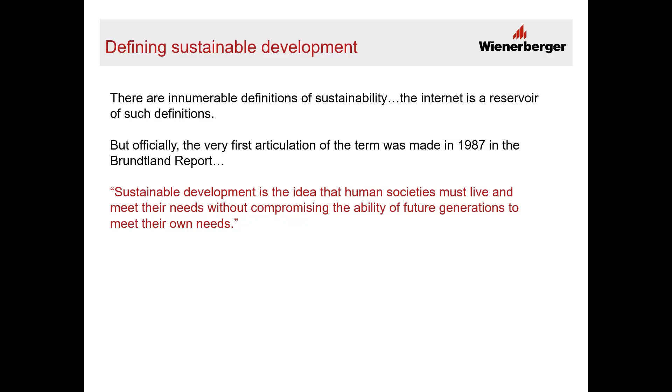But officially, the first articulation of this term was made in 1987 in the Brundtland report. The definition goes: sustainable development is the idea that human societies must live and meet their needs without compromising the ability of future generations to meet their own needs. A very meaningful statement, extremely meaningful, but it makes a lot of long-term sense. Let's live today, let's enjoy our lives today, without compromising on future generations and their ability to enjoy as well.

Why now? Yesterday we thought we knew how tomorrow would be. Today we have no idea how our tomorrow would be anymore. In times of extreme uncertainty, we must protect, in every capacity, our world for our future generations.

Sustainable development is a holistic concept with three key aspects: society, environment, and economy. Three major aspects - it can also be termed as ecology, emotions, economy. The concurrence of these three important parts of our life: one is environment, which is ecology; emotions is society, well-being; economy is economy - and that turns into being sustainable. That's exactly what we would look at in this. Let's have a poll question: three major aspects for sustainability.

Today, our industry - when I say construction industry - is affected with labor, impacted with finance, impacted with demand. How do we try to meet these ends together? Why is the construction industry always in a double whammy?

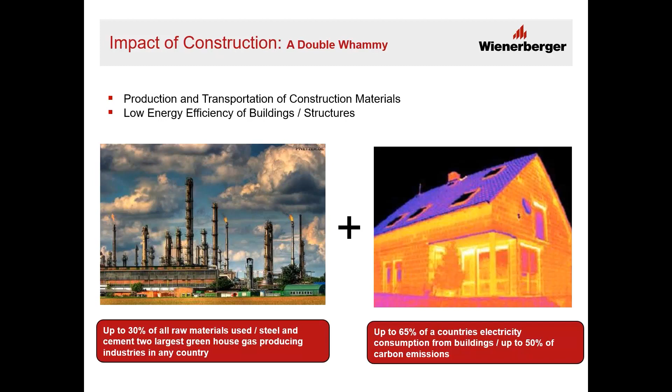The reason is the usage of raw materials used in construction, which is steel and cement, are the two largest greenhouse gas producing industries. The low energy efficiency of buildings which are designed needs to change into high energy efficiency of building structure designs.

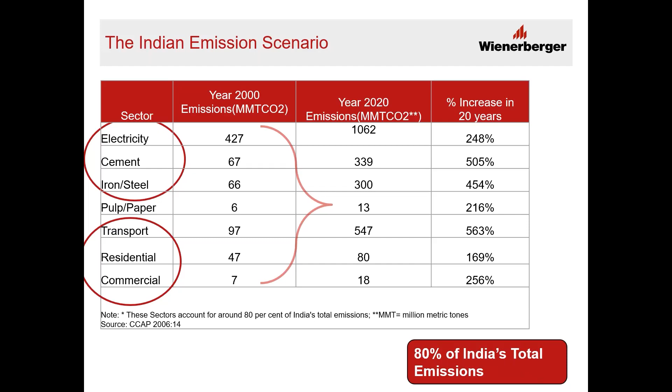It would be a double whammy as well. We need to take right steps and right actions and be conscious about our use now itself. As mentioned, construction industry happens to be for development.

Steel and cement are the 2 largest greenhouse gas producers. Up to 65% of our country's electricity consumption comes from buildings, residential buildings. Up to 50% contributes to our carbon emissions.

India, as a geography, can be divided into 5 climatic zones. 4 of these climatic zones are dominated by cooling requirements, meaning they need air conditioners to cool their houses and make life comfortable indoors of the house or office. That's exactly why residential demand is growing.

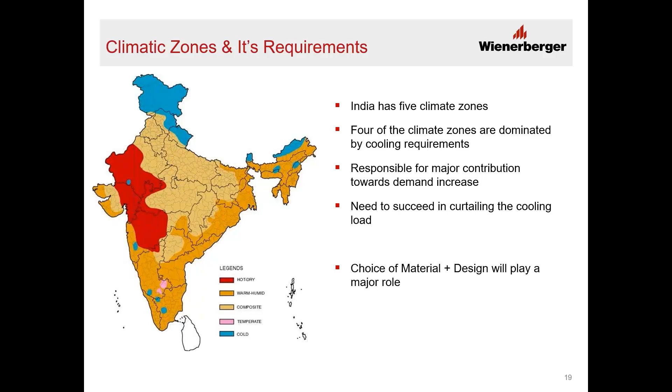How much is it growing for? Let's have a closer look at it. In the year 2017, residential energy consumption demand was 24% out of the total energy consumption. In 2030, it grows double digit, coming to 38% of the requirement. From 255 terawatt hours of energy consumed as electricity in 2017, it requires close to 850 terawatt hours of energy by the year 2030.

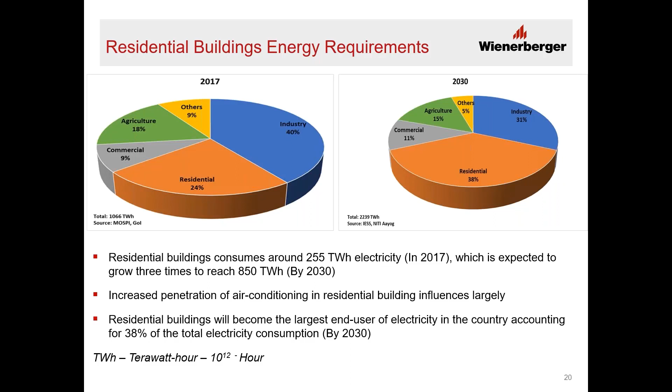That's huge growth as far as residential demand is concerned, and largely this increased penetration is because of air conditioning in residential and commercial buildings, which would influence the demand of energy as far as buildings are concerned.

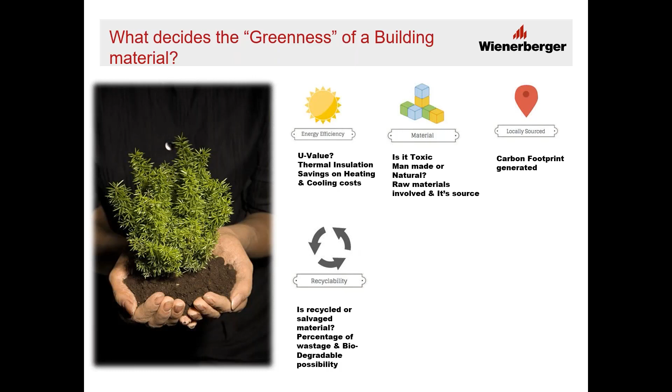Recyclability of the material is a very important aspect in the choice of material - is recycling possible during use and after use of the material we select? Manufacturing - the process of manufacturing, the polluting potential that an industry or manufacturing process creates, and most importantly, how labor intensive our process is.

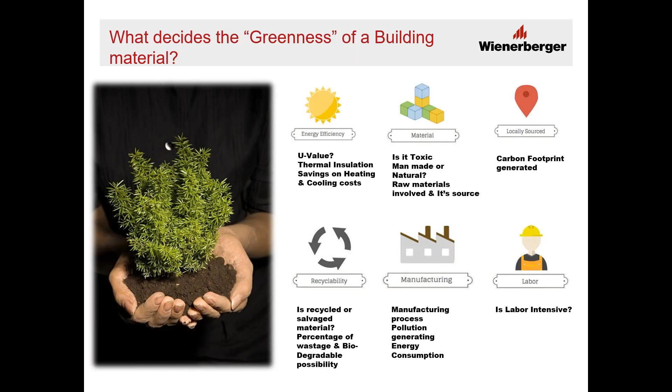Let's categorize the essentials, the needs, into economy, emotions, and ecology, and let's see how we can influence this by the right choice of material, the right selection of material. What is economy for construction?

Affordability is always the cost of the finished product - in this case, a building or a house. For a building, affordability comes from saving on cost of construction, but without compromising on quality, with efficiency in productivity and reducing wastage as much as possible.

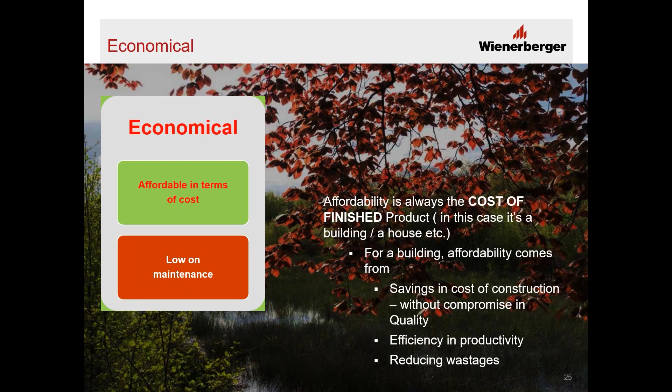Does weight matter? Yes, weight matters a lot. How? Let's compare commonly used clay walling materials - how does the weight factor run as far as individual walling materials are concerned for comparison? The densities - density is a translation of weight.

Let's look at density. Conventional clay bricks are around 1800 kg per cubic meter. Concrete blocks are 2200 kgs per cubic meter. Engineered clay hollow blocks are just 700 kg per cubic meter.

How does it influence things? What are the influencing aspects if we use a lightweight walling material? Huge amount of structural saving potential, enhanced stability of the structure, speed of construction, high output with less manpower, and low wastage.

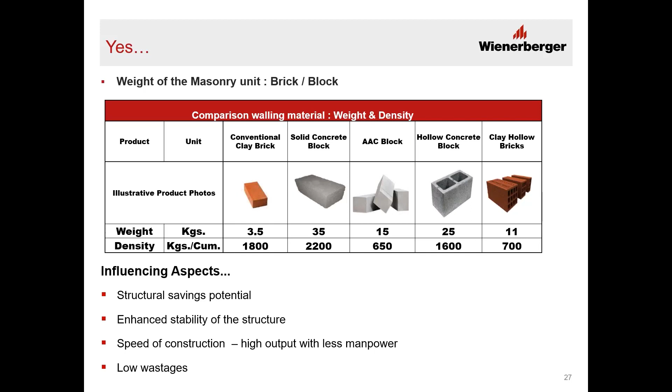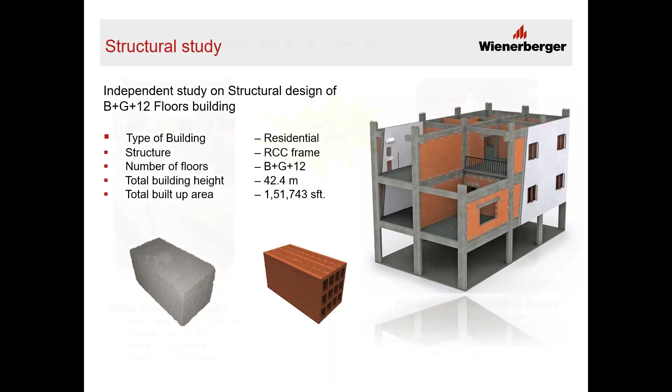For an independent study conducted on a basement ground plus 12 story building with a built-up area of 1,51,000 square feet, the walling materials considered were a high density walling material - solid concrete blocks at 2200 kg per cubic meter - and engineered clay hollow blocks at around 700 kg per cubic meter. Let's see how using 65% lighter weight material can influence the savings it can bring to the table.

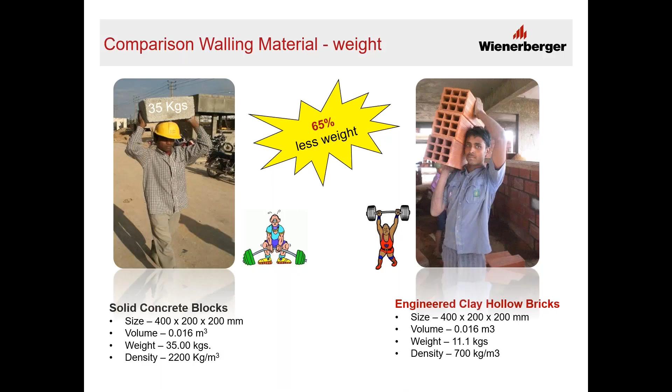The savings only in footings of the building. The building is basement, ground plus 12, which was used for the study. Only in concrete we could save close to 400 cubic meters of concrete because the footing sizes could be optimized using lightweight walling material.

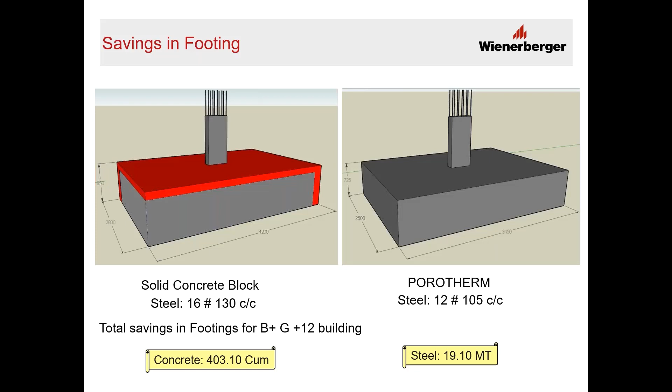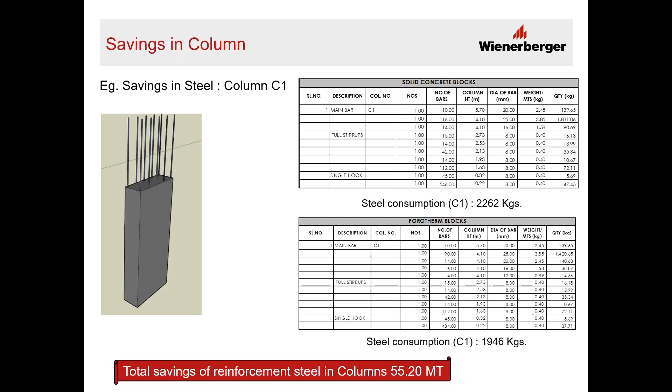In columns, the reinforcement steel which we could save is close to 55 metric tons on all the columns in the building, as well as savings from the beams, around 24-25 metric tons of reinforcement steel which goes into the beams.

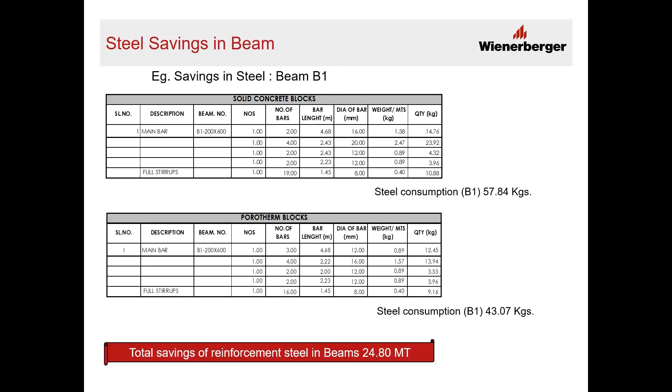As a summary, the deltas are huge, the differences are huge. What does it translate to in terms of savings? In concrete we could save close to 400 cubic meters of concrete. We could save close to 100 tons of steel. Today the prices of steel and cement or concrete are fluctuating, and the total structural savings which we could achieve is very encouraging. It's close to 53 rupees per square feet of the built-up area.

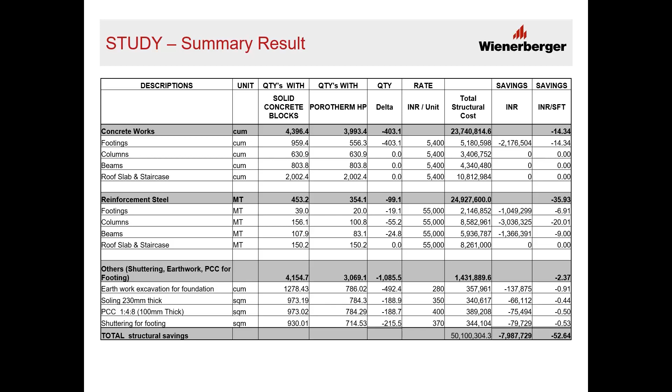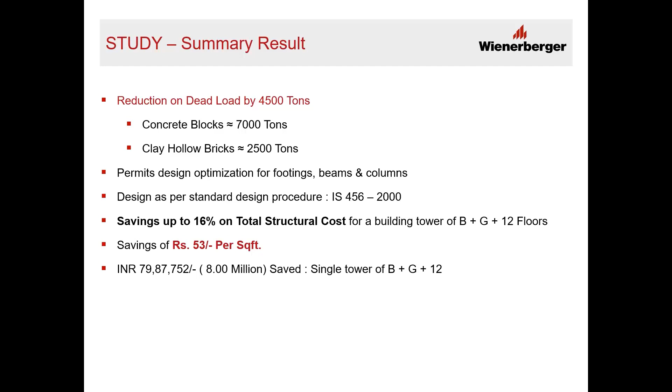So let's see the summary of the study. The dead load we reduced on the building by use of engineered clay hollow bricks is close to 4,500 tons. The design was as per IS standards without compromising on the design safety features of the building. There is a saving potential of close to 16% on total structural cost. Total cost saving would be close to 8 million rupees, which is huge and considerable.

Higher productivity ensures optimal use of manpower on site. It's not a matter of the lean period we are experiencing currently as far as manpower availability is concerned. In India, we celebrate a lot of festivals, which is good, but manpower also wish to go to their natives and celebrate. So it has become a perennial issue in terms of supply of manpower. Instead of cribbing about less manpower, can we change our view towards bringing in more productivity at the same task without compromising on the task? Can we increase the productivity of construction itself? Yes, there is a possibility for certain.

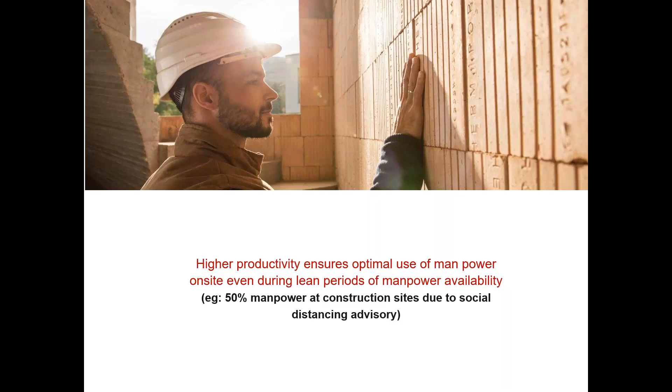Innovating continuously, combining precision and sustainability in the construction process. Porotherm dry fix system. It's a gluing system that guarantees super fast construction. Construction could be 5 times faster. That means saving in manpower would also translate to close to 5 times. Saves time and labor. Zero shrinkage cracks.

Zero requirement of water. Water is a natural resource, and we are already facing a huge dearth of natural water. No curing required at all for the masonry walls we construct. Zero requirement of mortar, no sand, no cement. It's such a benefit which we can get. Zero wastage at the site, clean and dry site.

This is the actual study conducted on a construction site. G+18 floor tower, built-up area 5 lakh square feet, walling area 4.5 lakh square feet, close to 5.2 lakh units of bricks used. We could complete the walling of this G+18 tower within 6 months. What was the manpower used? Just 40-45: masons were 20, helpers were around 25.

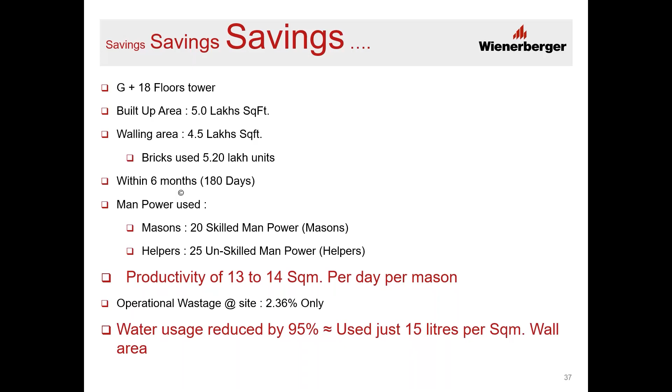The productivity could be escalated to 13 to 14 square meters per day per mason. Operational wastage at the site during construction was as low as 2.36% only. The best part of the whole study, which I personally like, is water use reduced by 95%. We use just 15 liters of water per square meter of wall area versus 300 liters in the conventional masonry system. Here we required only 15 liters of water because no curing is required.

Weight influences? Yes, weight influences. How? High savings on structural cost, enhanced productivity, and use of innovative systems can further enhance time and resource efficiency.

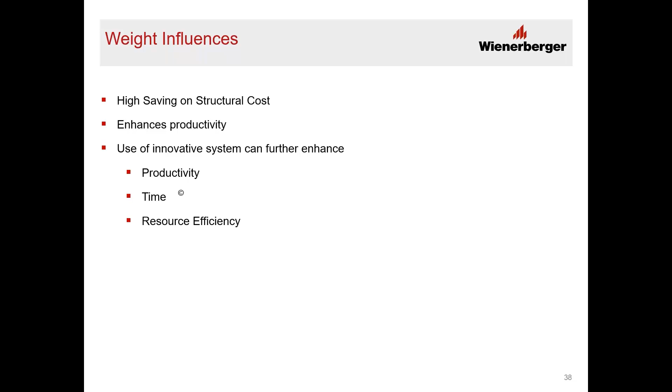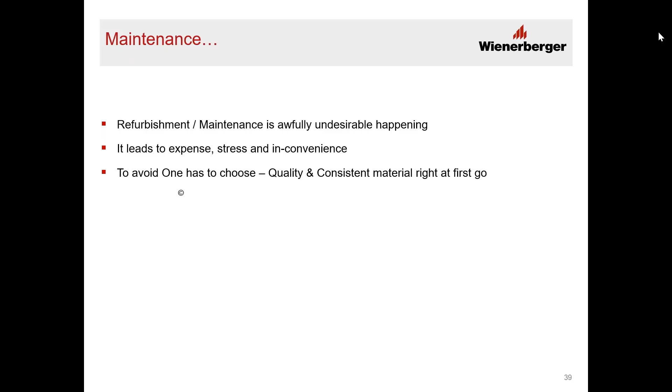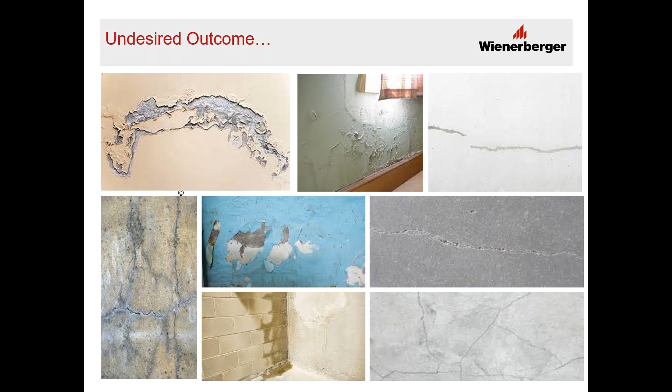Maintenance and refurbishment of the building is an awfully undesirable happening. It leads to expense, stress, and inconvenience. To avoid it, one has to choose quality and consistent material right at the first go. Undesired outcomes: seepages, shrinkage cracks, and that too in the early life of the building. Absolutely undesired. Let's look at water as the main culprit.

Water, yes, water is required for everything, but undesired quantity of water at undesired locations becomes the main culprit as far as building is concerned. Major problems that we face today, may it be seepage, may it be leakage, may it be shrinkage cracks, come as a major concern because of water.

Let's look at water absorbed by different walling materials used commonly in the construction industry: the clay bricks, the concrete blocks, the AAC, autoclaved aerated blocks, hollow concrete blocks, and clay hollow engineered bricks. Water absorbed is very varying. A conventional clay brick would absorb close to 2.5 liters of water when tested as per standard testing processes. Solid concrete block, 2.8 liters.

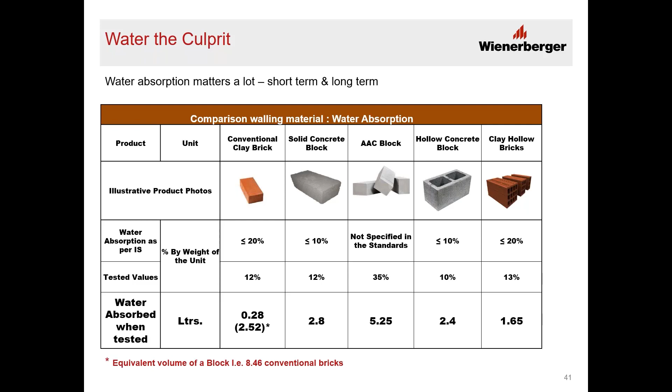Aerocon aerated concrete block would be 5.25 liters of water. It becomes a water holder as far as the wall is concerned within one unit of block. Engineered clay hollow bricks, just 1.6 liters of water. It affects largely because with that much water within the body of the block, the drying would also take a very long time.

Shrinkage cracks and high water content. Shrinkage cracks are one additional culprit in deteriorating the well-being of the house. Today's new age materials pose new challenges, especially on crack formations. Aerated concrete has an inherent characteristic of very high water absorption, due to which shrinkage cracks occur invariably. This leads to early maintenance on a freshly constructed wall, a very undesirable episode to happen with anybody for that matter.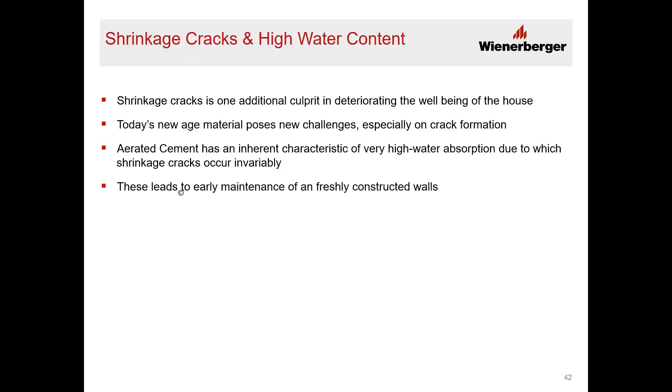Low on maintenance, engineered clay hollow blocks are resource efficient, known for their quality and consistency. Zero shrinkage cracks. Every brick is marked with a batch number or an identification number.

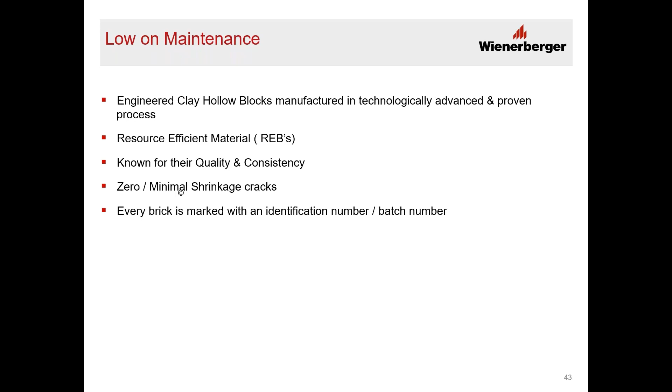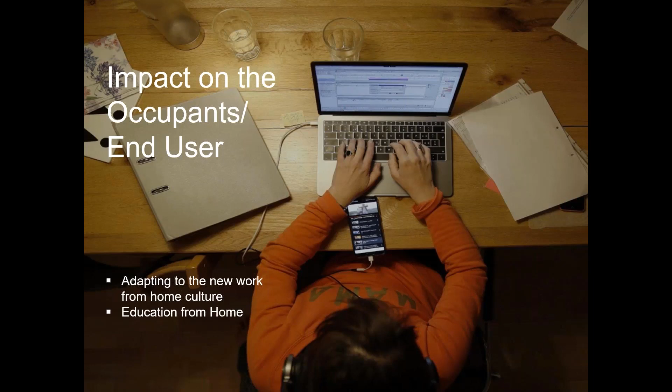How does today's world impact the end users? We are adapting to the new work culture, that is work from home, learn from home, study from home. Meeting the needs of occupants today: comfort at home, most important. Saving cost on electricity bills, very, very necessary. Comfortable temperatures for long work hours from home. Yes, the prime requirement today.

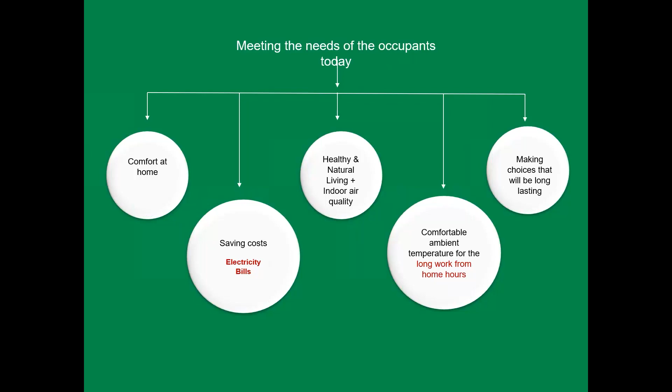Let's look at the emotions which are concerned and how we can bring natural as well as healthy living experiences by utilizing the right material. Clay. Clay is natural. Clay is healthy. Safe as well. Clay is the most adaptable, naturally occurring material. It's breathable. It regulates temperature and humidity. Shows excellent drying behavior. No toxic emissions at all. Healthy indoor air quality.

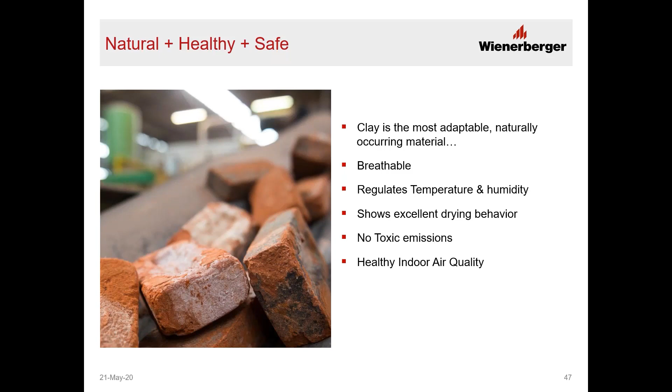What makes clay bricks sustainable? Why would clay bricks be called sustainable or resource efficient bricks? Let's have a quick look. Drastically reduces resources. The voids, the hollows present in the brick reduce the resources we use at every stage, right from production to utilization of the brick at the sites. Natural thermal insulation. Of course, the lower U values dominate because of the geometry of the clay product, but they also provide active and latent cooling.

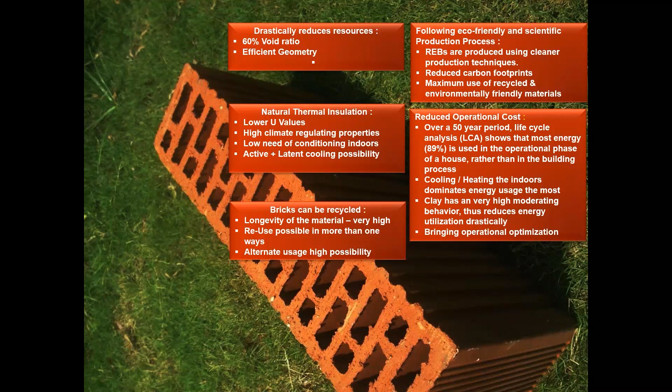The air voids. Air is the best thermal insulating material. It provides a lot of thermal comfort, a lot of insulation from heat ingress into the houses, and naturally thermal insulation can be brought into the house. Bricks can be recycled. Longevity of the material is well proven, very high. Reuse possibility as well, very high. Following eco-friendly and scientific production processes, the brick is manufactured in a very resource efficient manner. Reduced operational cost of the whole building if clay bricks are used.

How are hollow blocks resource efficient? Clay hollow blocks maximize output while minimizing the demand on resources. They hold huge saving potentials, some of which we have already seen in our earlier slides. Brick walls can contribute to improved indoor air quality by eliminating VOCs, and thereby the indoor environment can be free of any kind of emissions and allergens.

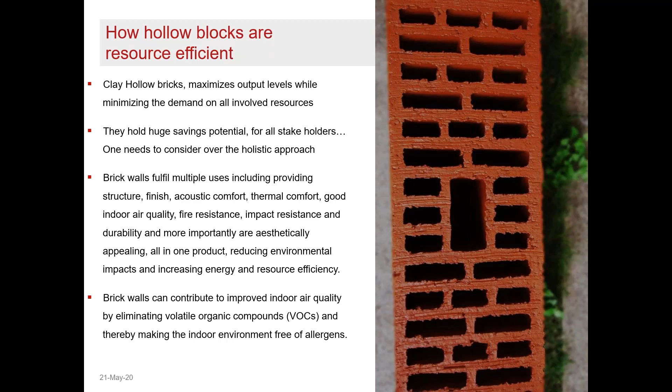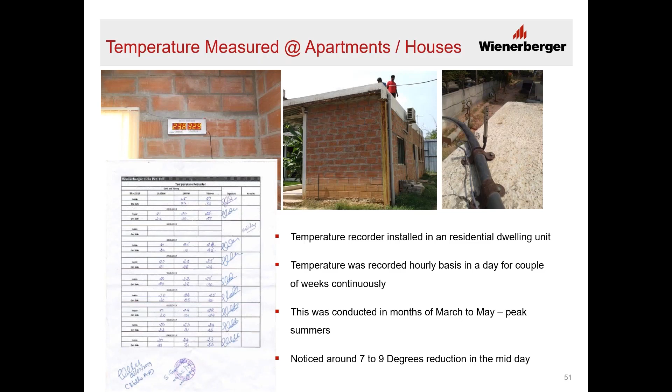While we talk of a lot of things, let's measure it in actual reality. We measured an apartment for the difference between the outdoor temperature and the indoor temperature. The temperatures were measured in the peak summer season, which normally runs from March to May, and the measurements were taken continuously for a long period of time. In a clay brick apartment, we could see a difference between outside and inside of close to 7 to 9 degrees Celsius. The inside was cooler without artificial cooling as compared to the outside temperature.

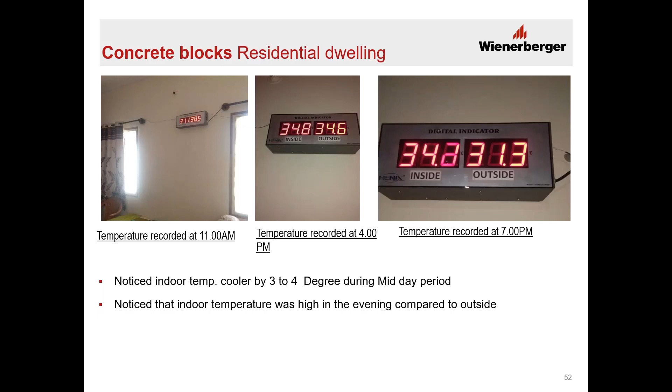We also did that in a concrete block residence or dwelling. We measured the temperature. Yes, there was some difference between outside and inside. It was just 3 to 4 degrees Celsius. But a very peculiar observation we could come across is that as the outside gets heated because of the sun, let's say 11 o'clock, 2 o'clock, 2 o'clock is the peak heat which we feel in the afternoon, the temperatures indoors also rise. In case of clay walling, it rises, but to a certain extent, not beyond 27-28 degrees Celsius.

And as soon as the outside becomes ambient, more comfortable, around 4 p.m., 4 in the evening onwards, the inside of the house built with clay hollow bricks also starts cooling very, very fast. It starts dropping the heat which was accumulated during the day very fast.

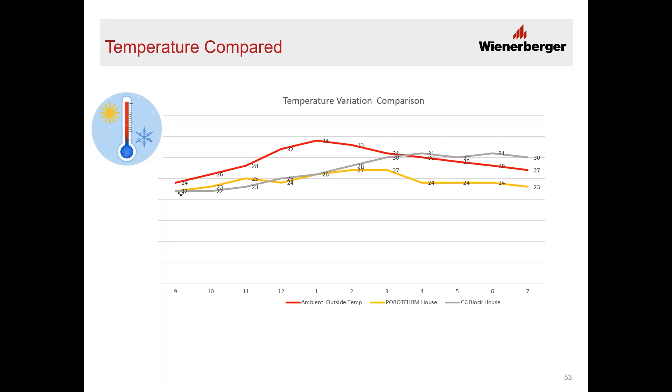Whereas in concrete, it keeps getting hotter and hotter. It reaches a maximum of 33-34 degrees Celsius. But as the outside starts becoming cooler, the temperature still remains hotter inside. The outside can be around 28 degrees Celsius, but inside it still hovers between 30 to 31 degrees Celsius.

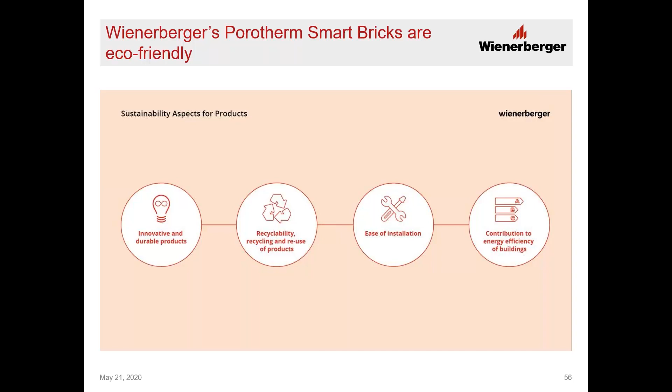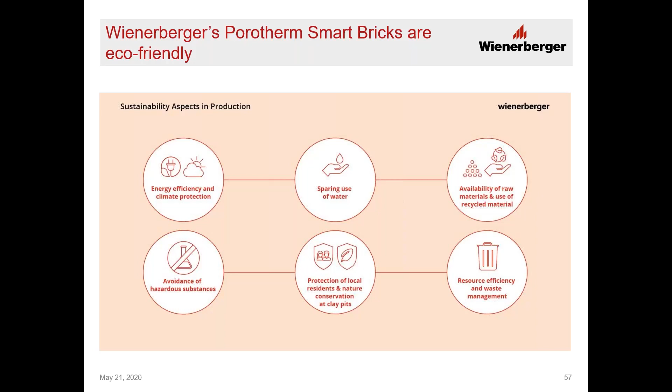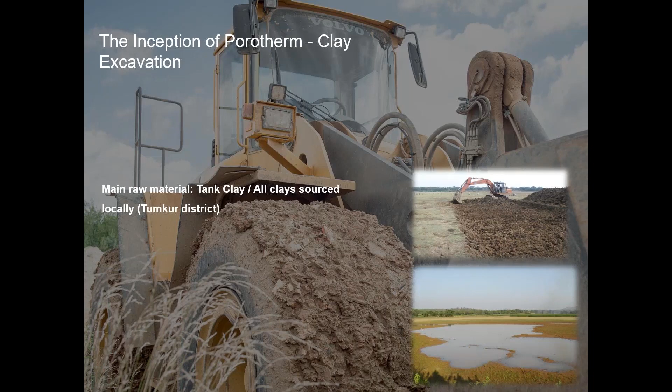The inception of Porotherm: clay excavation. Where does the clay come from? Where do we take clay from? Locally, yes. All clay is sourced within a distance of 4 to 12 kilometers. It's sourced by desilting clay tanks, non-agricultural land. It regenerates the water tanks. It gives new life to the lakes, whereas we take the clay to manufacture bricks.

Naturally available organic waste used as embedded body fuel. No toxic chemicals, not a single gram of cement, no color pigments or binding agents being used in these bricks. It's green building rated, it's GRIHA rated as well.

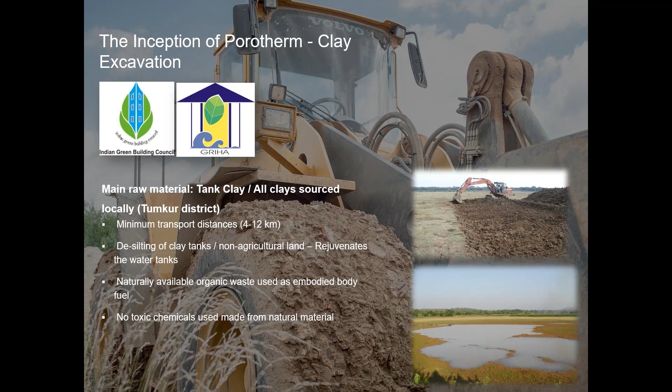Dead lake bed. This is the lake bed which is dead. There is no water in the lake. By efforts over more than 10 years, we were able to have a lake so beautiful. I can call it a live lake. I in fact wanted to give a title on the top, but the photo is so very beautiful, I constrained myself from putting a title on the top. It's a live lake. From a dead lake, we converted it to a live lake.

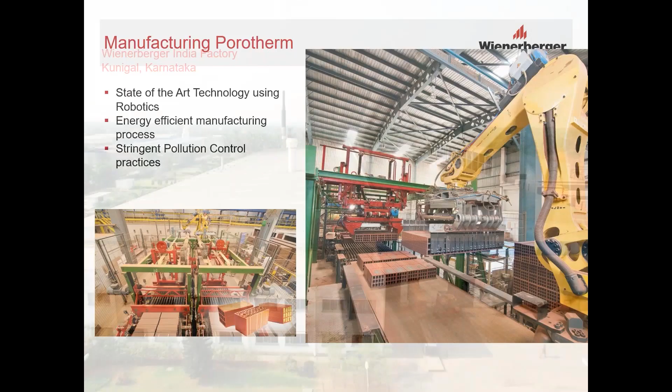Wienerberger India factory, which is located at Kunigal, hardly 60 kilometers from Bangalore. Manufacturing: state-of-the-art technology using robotics, energy efficient manufacturing process, stringent pollution control practices. Quality and originality assured. Every brick we manufacture is marked with a batch number and the date it is manufactured. It is marked with the name and the logo of the company. Porotherm is a registered trademark of Wienerberger India.

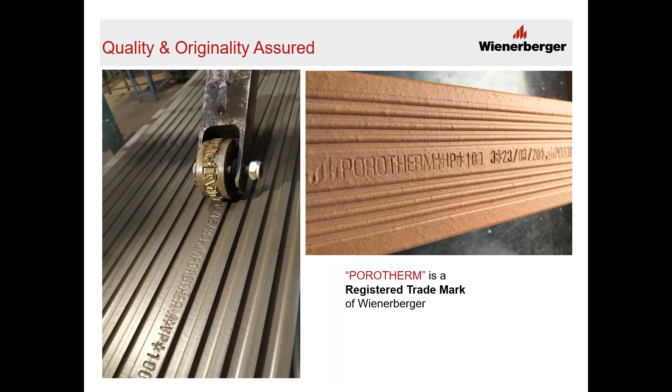In conclusion, the COVID-19 pandemic is challenging the status quo, accelerating our transition to a low carbon economy. The importance of building layout, plan, and physical structure will be of even greater significance to the health and well-being of its occupants, much more than ever before. What was traditionally accepted and normalized as a norm is no longer relevant.

We need to go back to our drawing boards, rethink, re-emphasize fresh requirements, fresh demands which are coming up in terms of design aspects of the building as well as the choice of material for the building. Our vision needs to be long term and sustainable, considering the ever changing post COVID era. Every decision we make should positively impact all stakeholders, the builders, the developers, the occupants, the users at the same time.